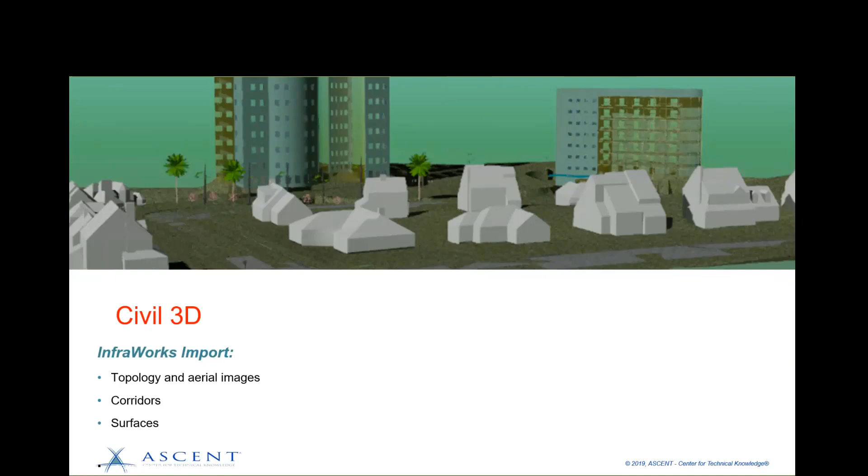Whereas InfraWorks was a nice conceptual visualization tool, for me Civil 3D is primarily a design development, detail design tool. We'll be importing the InfraWorks model we generated last month—the topology, as well as the corridors and surfaces—directly into Civil 3D. We'll also be referencing other sources, such as GIS sources.

A little caveat here: there's a very nice tool both within InfraWorks and Civil 3D, the ArcGIS connector, but I won't be using that. I didn't use it last month, and I'm not going to be using it in Civil 3D.

We'll be incorporating the sketch we generated last month, as well as CAD and Revit so-called drawings, which are DWGs exported from Revit. The Formit FBX file we could use for Formit is no longer supported as an import in Civil 3D.

We'll be looking at design options within Civil 3D by utilizing data shortcuts and swapping out different data shortcuts for different options. We'll be looking at different sites, and we'll be managing the XREFs through various layer states.

And then finally, in preparation for Revit, we'll be producing a shared reference point that Revit can read. Then we'll be publishing our surface within Civil 3D to BIM 360, which can then be linked into the Revit file.

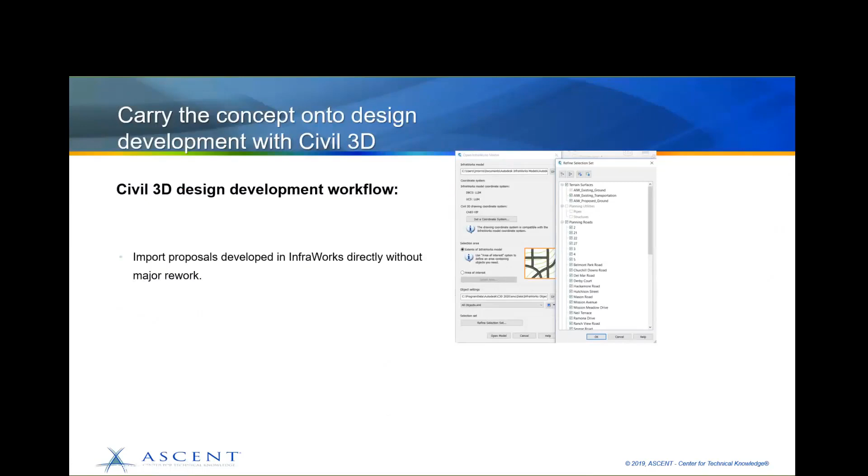So to look at this in a little more detail, we will first be importing the proposal from InfraWorks directly into Civil 3D without any major rework. We'll be XREFing in the 2D Revit footprint into our Civil 3D site plan.

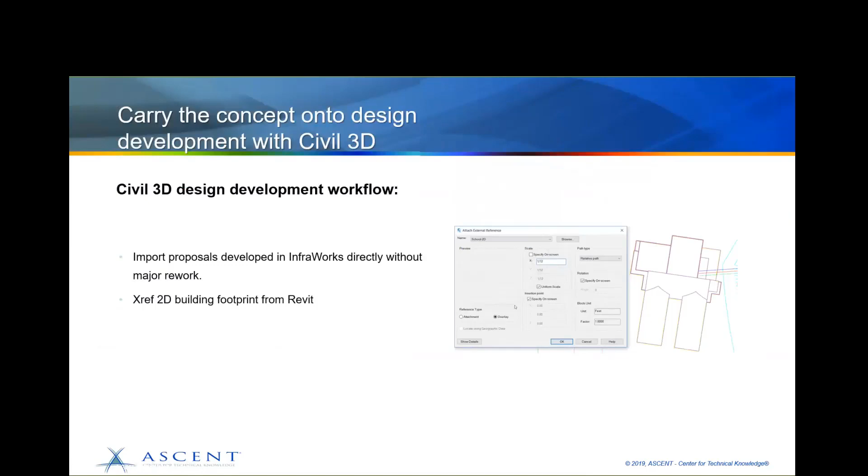We'll be using Raster Design to incorporate the sketch I generated last month. We'll be setting up an XML file for shared coordinates to be imported into Revit later on. And then we'll be swapping out data shortcuts through the Data Shortcut Manager to look at various design options and see how they fit within our overall design.

We'll be using Civil 3D sites for additional layout options, and then finally we'll be publishing the surfaces we generate in Civil 3D into BIM 360, which can then be incorporated into Revit.

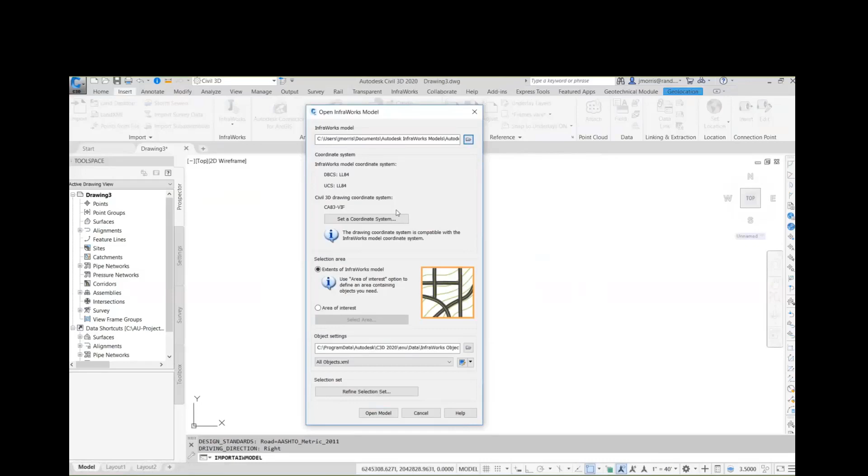Rather than bringing the entire InfraWorks model, I'm going to select the area that I want to import via Window. And it brings in the same Bing Maps file that we had in InfraWorks, so we can see the area that we want to import.

And now that I've limited the area that I want to import, I can also refine my selection set by selecting the InfraWorks objects that I do want to bring in. I don't want to bring in the planning roads—those are the roads that InfraWorks generates automatically from the model builder. I do want to bring in the component roads, which will be converted into Civil 3D corridors. And for the surfaces, I don't want to bring in the existing transportation surface. That is the surface that gets draped over the planning roads, which is basically already your existing surface.

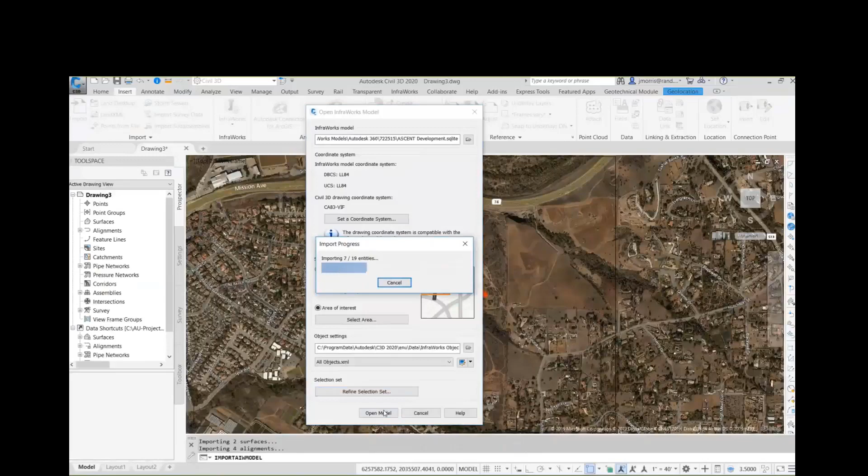So I'm just bringing in my component roads and my existing ground and my proposed ground that I generated last month with the grading. And then I open the model. It takes a little while to import that. And now I no longer need the Bing Maps, so I go to my geolocation tab to turn off my Bing Maps.

Now what I'm going to do is I'm going to save this into my surfaces reference file as IWX surface. And we have our data shortcuts already set up, so within this drawing, I'm going to create data shortcuts for the InfraWorks surfaces, my existing ground, and my final ground.

Now, after I did that, I'm going to do another Save As, and I'm going to save this now in my working folder. Now, this may seem a little bit strange, but bear with me, and hopefully eventually it'll make sense. Because in my workflow, this is now going to become my working drawing. I'm going to call it Concept A.

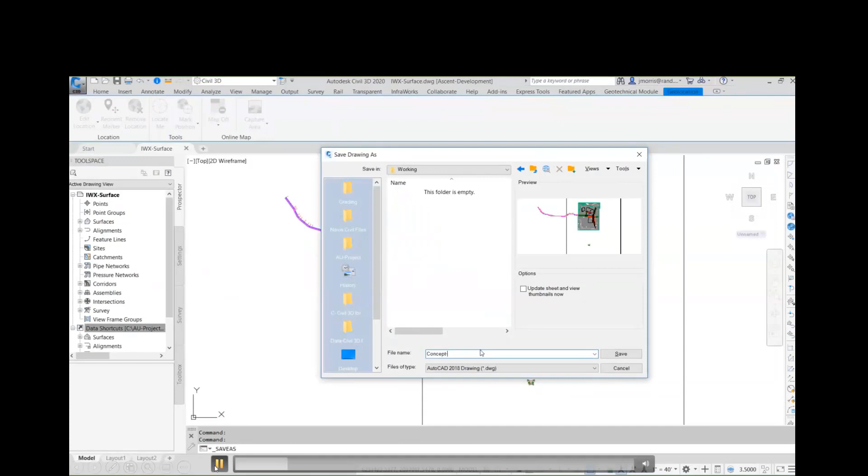Because I want to have ultimate flexibility in the surfaces that I want to swap in and out, and for that reason, I'm going to now rename the surfaces to simply EG for my existing ground and FG for my proposed ground.

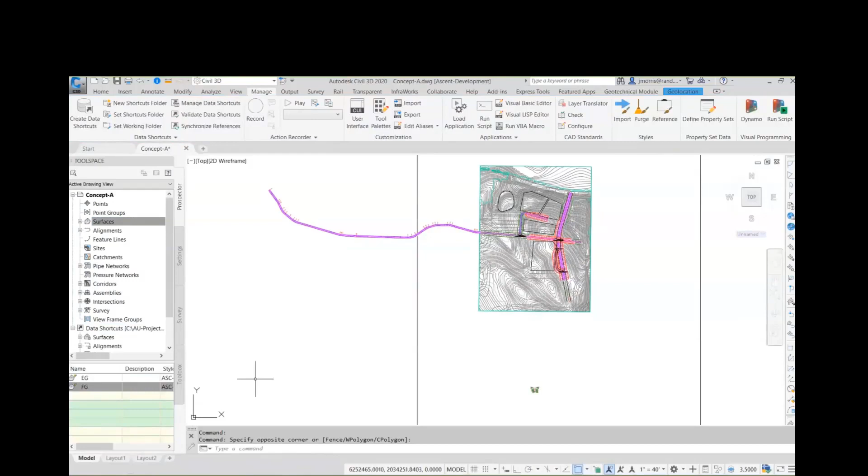And then I'm going to go to my Manage Data Shortcuts, and I'm going to link my existing ground to my InfraWorks surface. Make sure to click the link button in between, and also link my final ground to my InfraWorks finished ground surface.

So once again, the reason I'm doing that is later on, as we get into more design alternatives, I can go to my Data Shortcut Manager and simply swap out other surfaces that I may have into EG and FG, and the dynamic relationships within Civil 3D will be maintained with these different surface options.

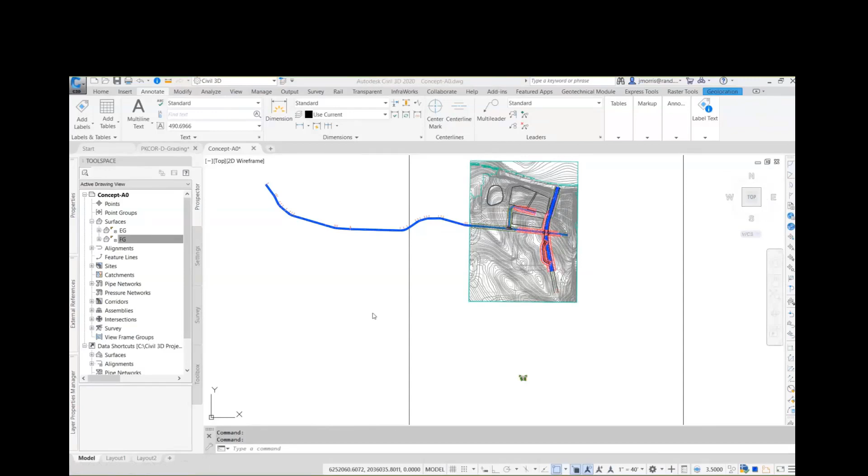So as I did last month within InfraWorks, I did a slope analysis, an aspect analysis, and we also did a variety of earthworks calculations. We're going to be doing the same thing within Civil 3D. We're going to start our slope analysis.

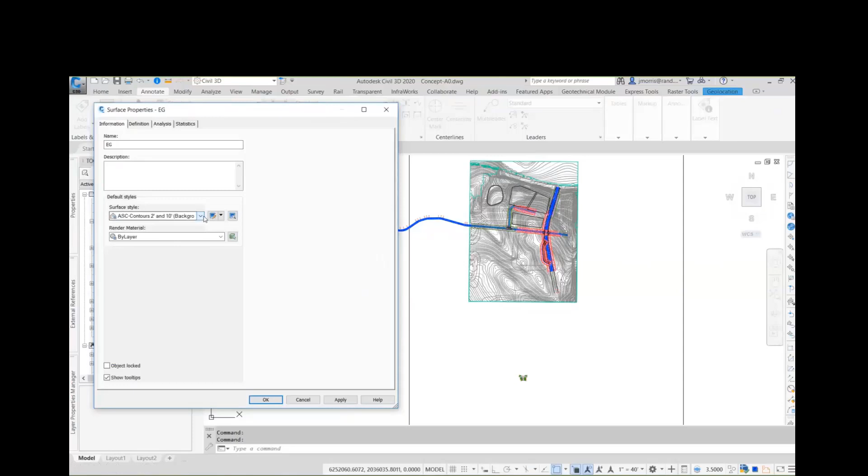The 4 ranges are already set up, going from 5 to 30%, and I duplicated the colors that I had in InfraWorks. I go over and I set my style to the slope style, and it does the analysis on that.

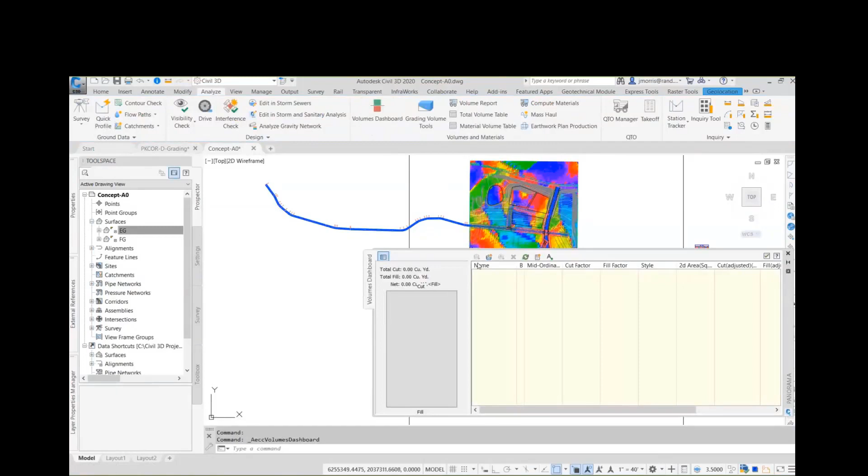And very similarly, I can do the aspect analysis like I did last month, again with the same steps that I did earlier. And for my earthworks, I'm going to go to my Analyze tab, my Volumes dashboard, and I need to create a new volume surface. I'll call it Site Volumes.

And I'm going to compare my existing ground, EG, with my finished ground, FG, and it calculates the volume between the two.

Now with that site volume surface that I have, I can do another range analysis, and it's going to show me where my cuts and my fills are. The deeper the cuts, the deeper the red, and the same for the greens.

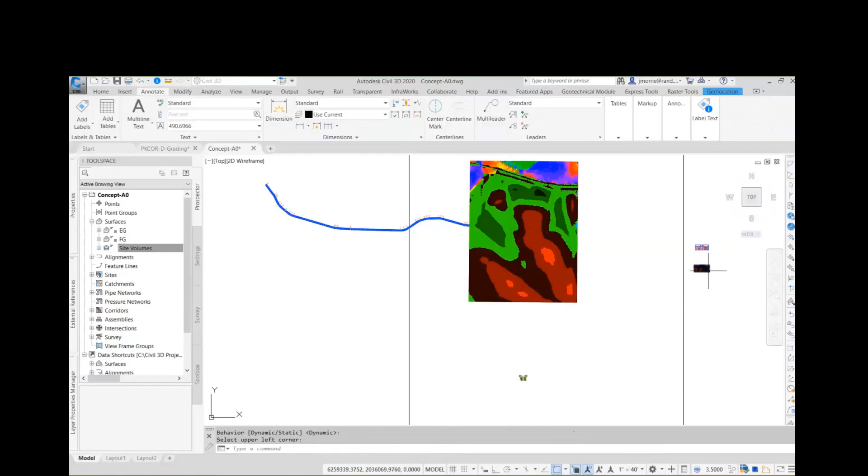Now in InfraWorks, the volumes were all shown in a tooltip, and I had to write these down. With Civil 3D, we can make these permanent by producing tables. I'm going to add a table for my volume surface. It's a dynamic table, so as the surfaces change, my volumes will update. I can also produce another table for my slopes above.

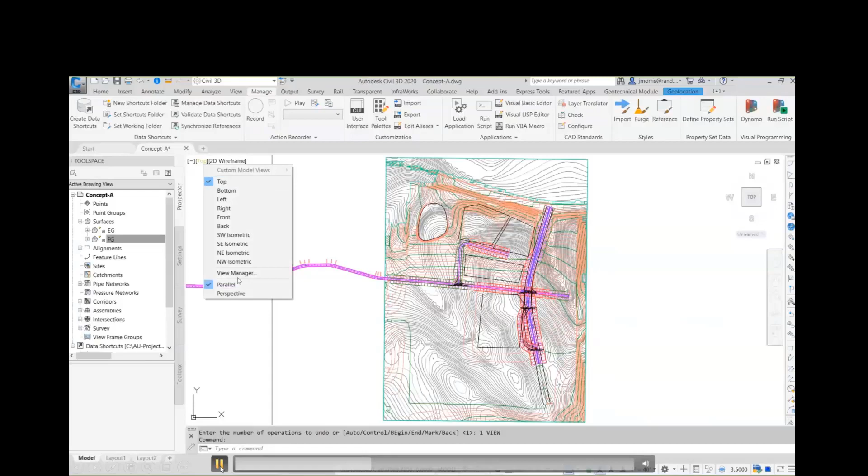I'm going to jump forward a little bit. In InfraWorks, we had bookmarks so we could quickly go back to a particular area we want to work with. We can duplicate the same with Civil 3D via AutoCAD by producing a variety of views. I'm zooming into the area I want and creating a view for this, called Plan. Go to my View Manager, create a new view for Plan, and be careful of the layer snapshots - it's kind of a double-edged sword with that functionality, sometimes it can mess you up.

Now I'm going to attach my XREF, very similar to what I did last month within InfraWorks, of my proposed engineering. That XREF was georeferenced, so I selected it, and it came directly at 0,0, rotation angle 0, and it fell right into place.

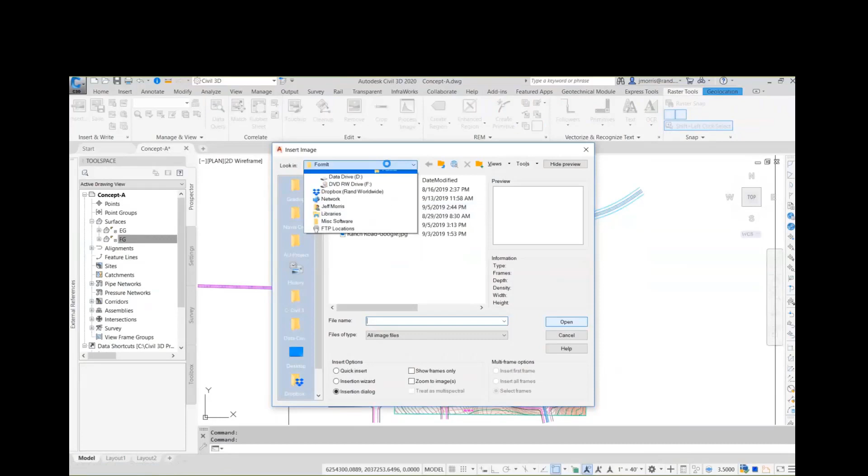I'm bringing in my sketch that I generated last month with the SketchBook program, like I did with InfraWorks, and I'm utilizing Raster Design for this tool. So I select via my Desktop Connector, I go into BIM 360 via my Desktop Connector and select the image I want to bring in. I'm using my insertion dialog box, and I'm going to pick my insertion point and roughly give it the scale that I want.

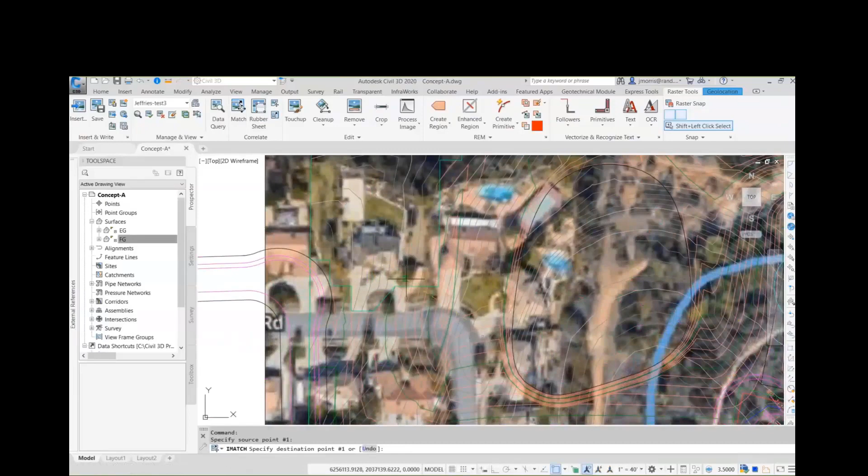Last month within InfraWorks, we could place by reference point, with up to 3 reference points so we could reference the image to the model. Within Raster Design, we have 2 options: rubber sheeting, which allows us to rubber sheet with as many reference points as you want, or match, which allows 2 reference points. In this case, I'm going to use the match command. I select the point within my image, and then tell it which point that should coincide with the model. With the match command, I can do that up to two times.

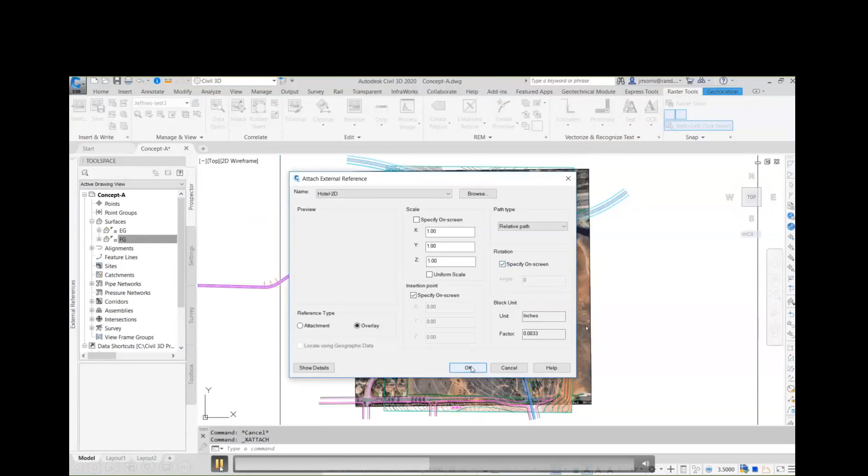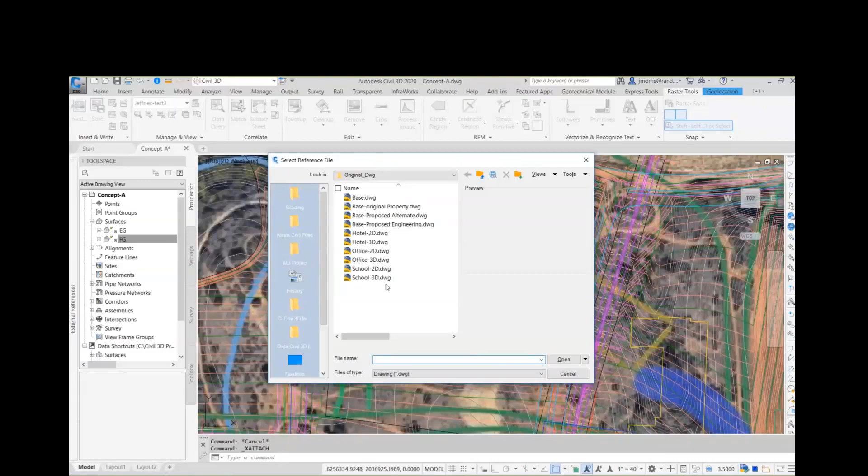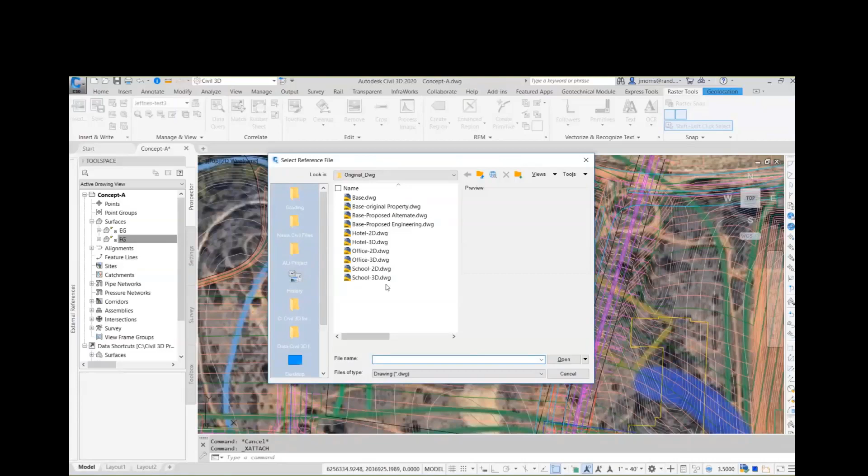Now I want to place another XREF - this is the 2D footprint of my Revit hotel and my Revit school. In this case, I need to specify my insertion point and my rotation, and I kind of eyeball where it should be and eyeball the rotation angle. I'll be using the Align command, the AutoCAD align command, later on to bring it into place. You'll also notice I have different DWGs - Hotel 2D and Hotel 3D, Office 2D and Office 3D - so that I can swap my 2D footprint into a 3D model for visualization later on.

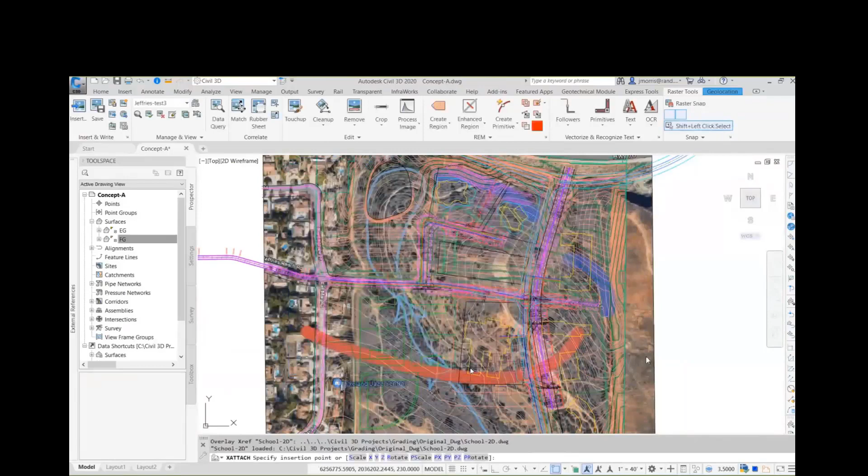So we're bringing in the school now. I place it into place and eyeball the rotation; later on I'll use the align tool to finish that up. With the school, even though it says it's 1:1 and my base unit is feet, it's actually not, and I have to scale it down by 12. When I select my insertion point, the crucial part is that I use my Nearest snap and select the contour, so it brings it in near that contour elevation.

Once again, I position it as properly as best I can, and I'll be using the align tool later on. The align tool is not at all like the Revit align tool, but in some ways it's just as powerful. It allows me to pick 2 or 3 points, similar to what I did with my match, and I select my destination point.

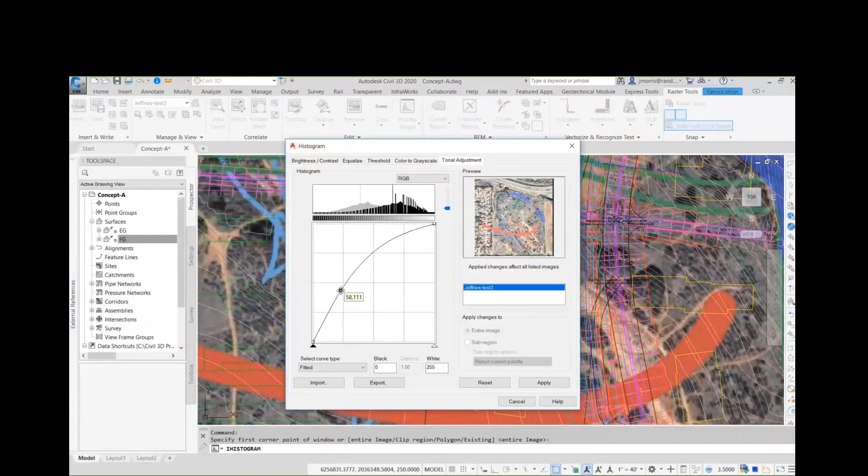Before that, I'm going to process this image. It's a little bit too strong, so I select the image, and within the histogram, I can adjust the tones of the image, and see the preview as to how it's going to be adjusted. Now the image isn't near as strong as it used to be. But on second thought, I don't even want to see the image. What I like about raster design is I can have multiple images and simply select the image that I want to load or unload or edit with the pull down.

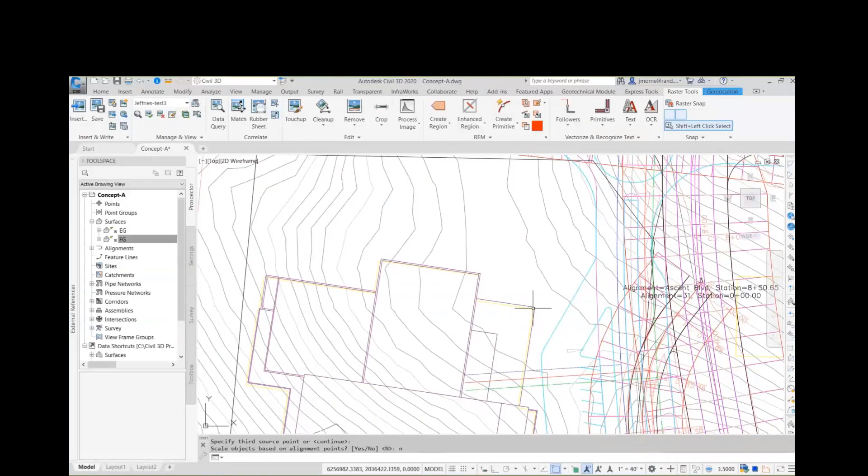Lastly, here's where we're going to be using the align command. This is where I use the .xy filter when it needs the Z. After I give it 2 points with the align command, I have the option of giving it a third point, and that would rotate it in 3D. If I don't need to rotate it in 3D, I say no. Then it asks me if I want to scale the objects based on the 2 points, and again I can say yes or no. In this case, I said no, I don't want to scale the object.

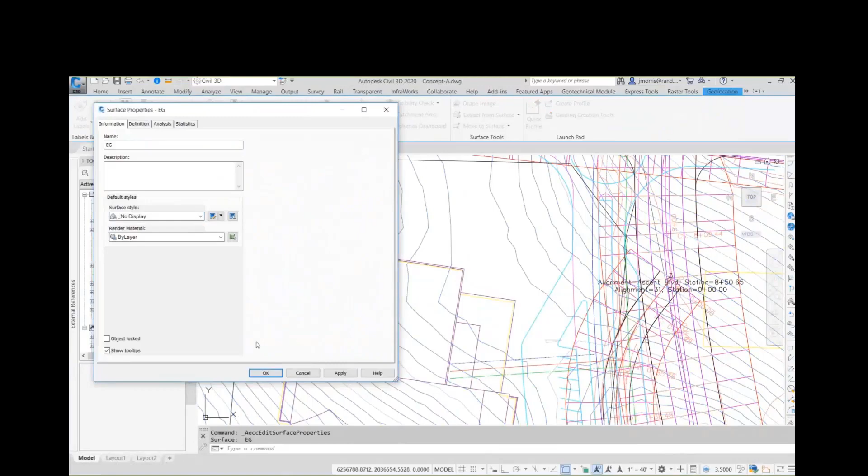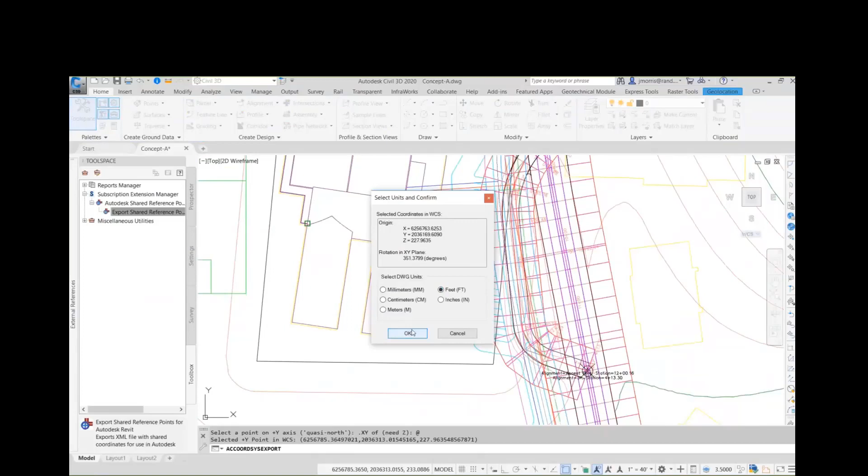Now it's time to generate the shared reference point. So I go to my toolbox and execute my shared reference point. It's looking for the base point of my building. So I select my base point, and here again I use my .xy filter that is also accessible through my right-click menu. Here's my .xy, select that point as my quasi-north, and again I put the @ symbol in. I verify the elevations and that this is in feet, and then I browse out, it already goes up to BIM 360 for the shared reference point XML file.

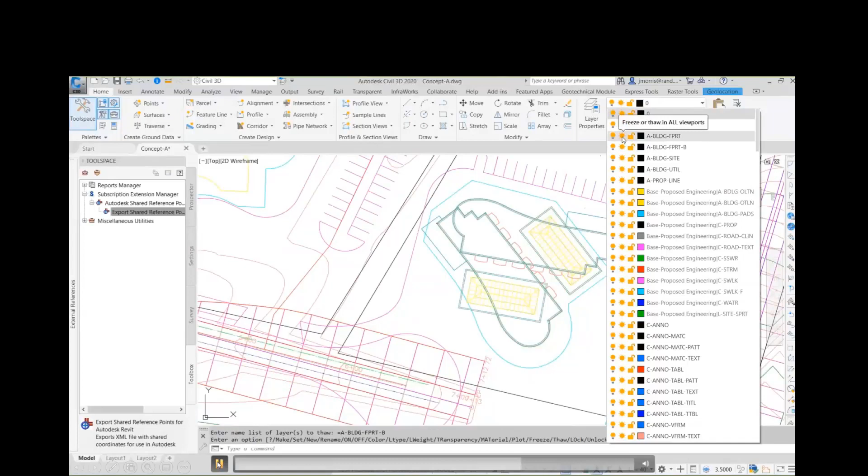Now with regard to the school, the hotel, we have 2 different options, and I have 2 different layers, building footprint and building footprint B. Both XREFs are in there, and they're on different layers. So simply by thawing and freezing a layer, I can look at the different options available to me. I'm going to thaw my building footprint B and freeze my building footprint.

And I'm going to execute my shared reference point again by selecting my base point, my quasi-north point. Again, I give it the elevations. And in this case, you notice that I picked the wrong point, so you see that the Z elevation is actually 14. So I'll need to redo that. Always keep an eye on this select units to see that the elevation is in the proper range.

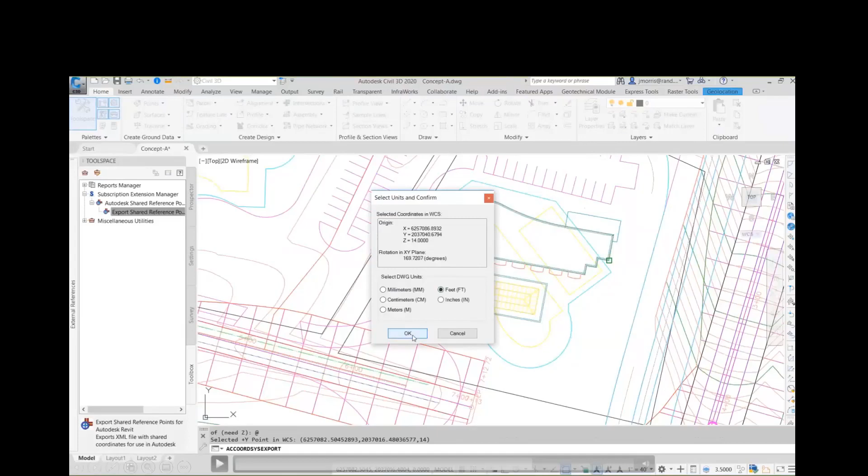And again, I share it into BIM 360 via my desktop connector. It doesn't need to be shared in BIM 360. You could just simply email that to your client.

Now we're going to generate a feature line for our preliminary grading. I select this XREF boundary as my feature line, and this is where we get into options. I kind of skim over this a little bit, but let me explain this more. The options within Civil 3D allow the sites to work with multiple design options. The sites will contain grading objects, parcels, some alignments if need be. The nice thing about sites is that we can have all these different design options available to us, all within our grading and our parcels, etc.

And then when we decide on a particular design option, that's when first we'll need to archive the drawing, and then we can simply delete the sites that we no longer need, and all the alignments and feature lines and parcels and grading that belong to that site get eliminated in one fell swoop. So with proper management, it works quite well, but again, it can be kind of dangerous.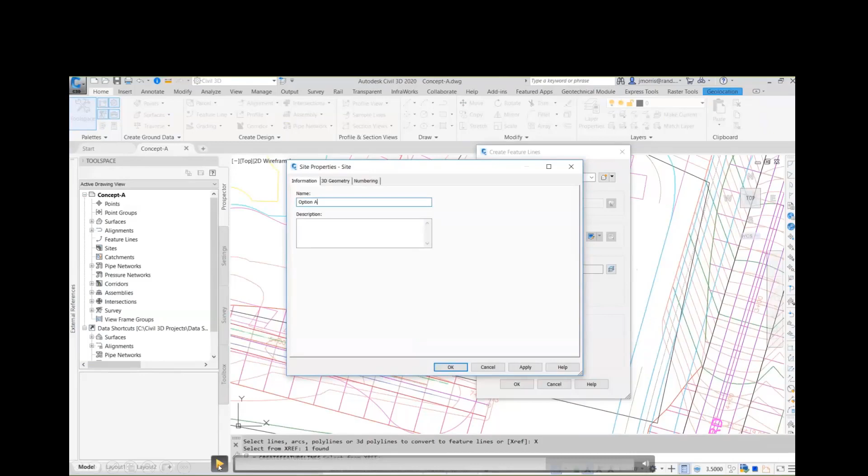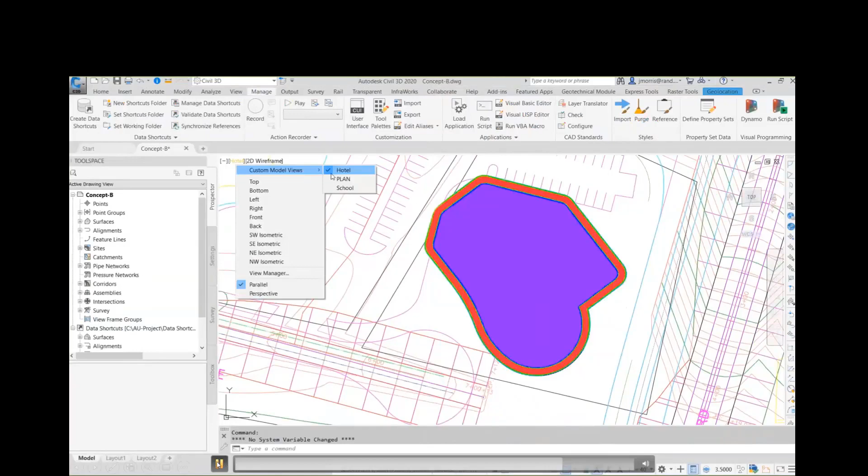I'll name this as a hotel. And the feature line, I want to read the elevation from my finished ground. I'm going to set this relative to the finished ground, 1 foot up. So as my finished ground changes, my feature line will change. Now with the grading, I finished the grading, and I simply gave it a surface style so I can see my grading. So these are the 2 features with my grading.

Now we're going to fast forward here a little bit, and we have now different design options. I can, as I explained earlier, swap out my different existing site surface and my finished surface with FG. And so we can quite quickly see the different design options that are available to us by swapping out the different surfaces through our data shortcuts.

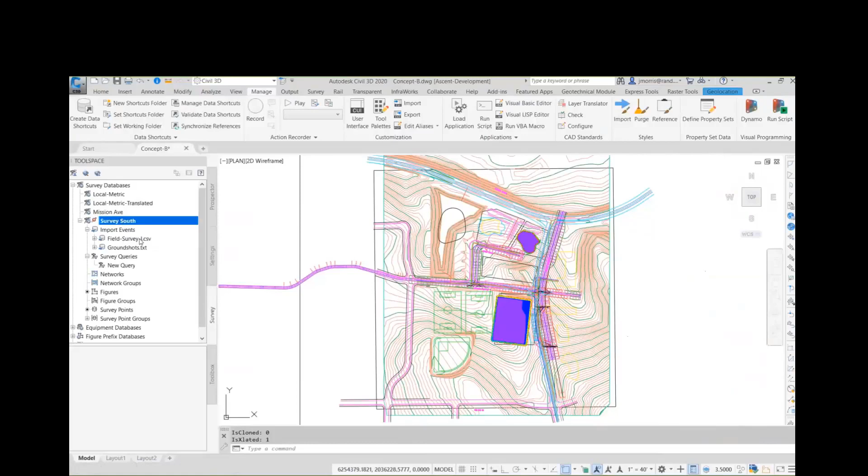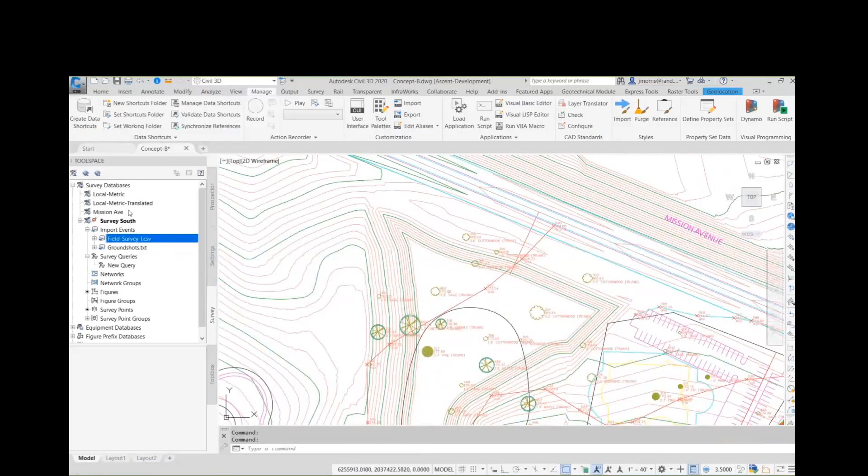Now we have some surveys that we can incorporate. They've already been processed, so I can simply right-click on the survey I want and insert it into my drawing. With a well-tempered survey database, the trees come in at proper scale regarding the drip lines. And as I bring in my field book and insert it into the drawing, it comes with all the points and all the survey figures as well.

Now it's time to publish our surfaces. We're going to publish our hotel surface. For this one, we do require BIM 360, and it goes directly through our desktop connector into the BIM 360 project. We're publishing each surface to its own individual file, and we're going to update the surface style so we have better fidelity within Revit later on.

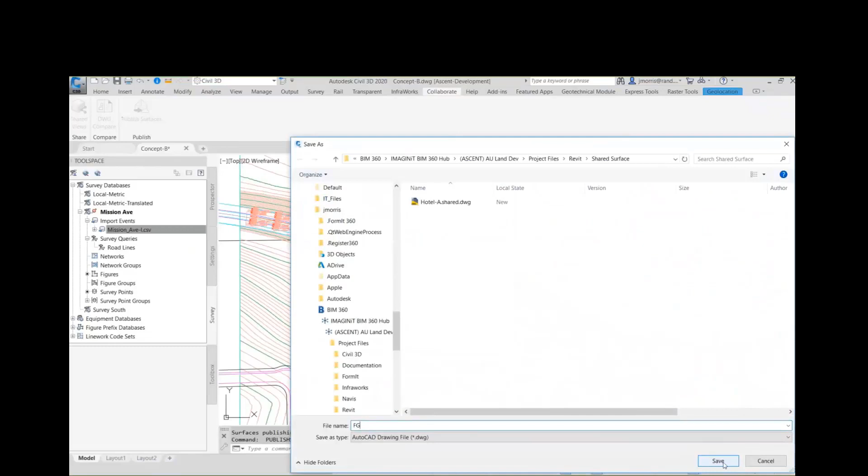I'm going to publish also my finished ground surface. It goes again into our BIM 360 hub via our desktop connector, and we're going to swap out our styles as well. Now, if you're quick enough, you can right-click on your system tray to see whatever your pending options will be within your desktop connector.

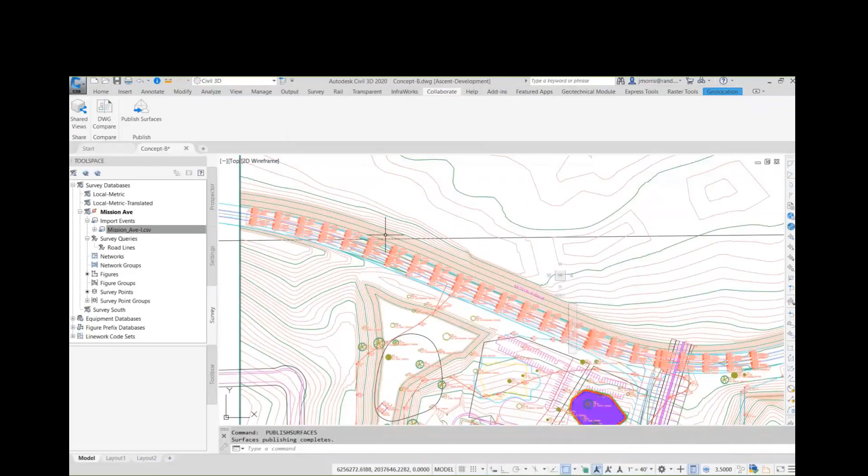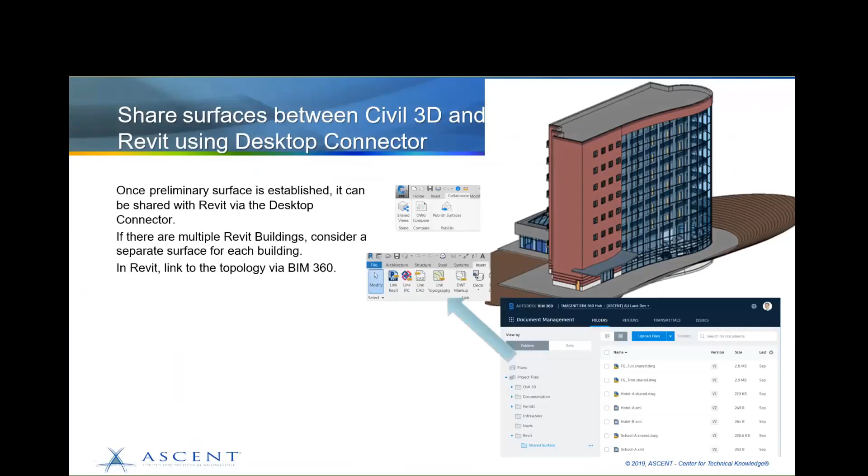So the next step is to go into Revit. As we saw, we just published these surfaces to go into Revit via the desktop connector. If we have multiple Revit buildings, we should create multiple surfaces to be as flexible as possible. So via BIM 360 and Revit, we go to link our topography. The links within Revit of the topography become a new tab within Manage Links, and I can load them, unload them, reload them, just like any other link within Revit.

So within Revit, we're going to be creating the base point and our survey point, very similar to what we did in Civil 3D, to read the coordinates and elevations of that shared reference point we generated. In Revit, we also have sites that are different than the Civil 3D sites, and we typically want to rotate our site plan to true north versus project north.

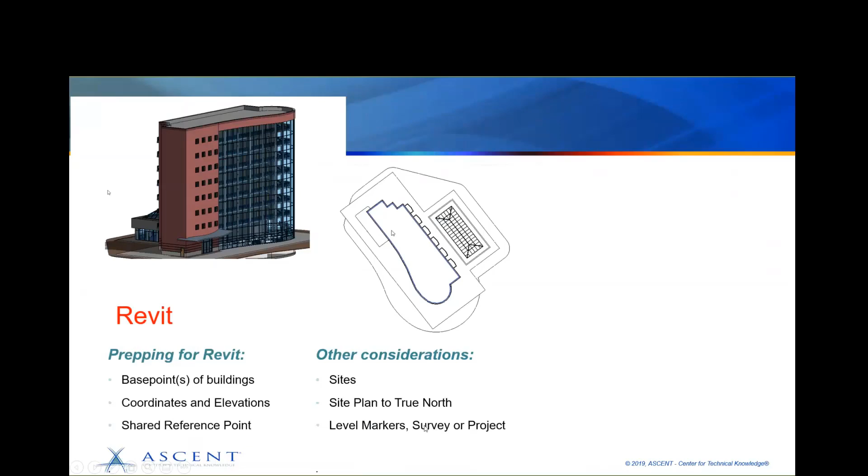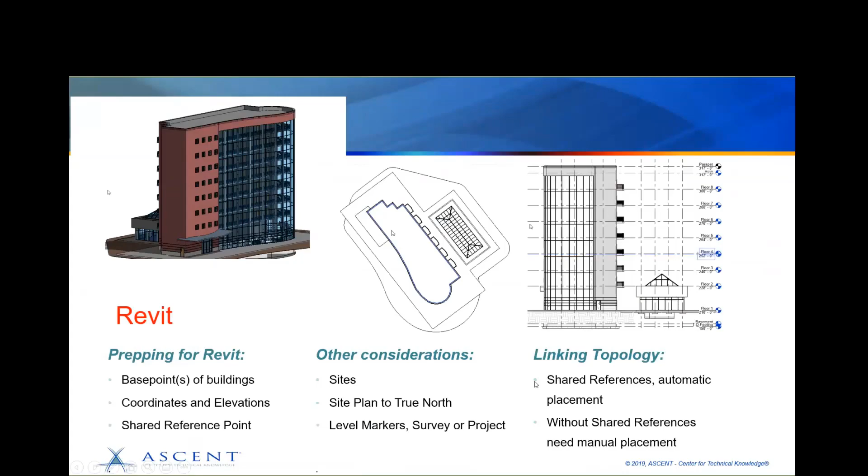The level markers within Revit can either be project-based points, so they're relative to our ground level, or they can be survey elevations that would give us the sea level elevations. And then when we link our topology, since we have the shared reference point, the topology falls right into place. Without the shared reference point, we need to manually place them.

Again, this is a pre-recorded video, so wish me luck.

So in Revit here, we have 3 drawing tabs already set up. One shows a 3D view, one is the east elevation of the building, and one is the site plan.

First, since we're going to change our coordinates, it's probably wise to do a save as of this project and call it Modern Hotel Shared, just in case something happens. On my site plan, I'm going to go to my project properties and change my orientation from Project North to True North and apply that.

Nothing has happened yet because we haven't yet brought in any reference points. So we're going to bring in our shared reference file, and just like Civil 3D, I select my base point and my true north point. In this case, I don't need to worry about the elevations.

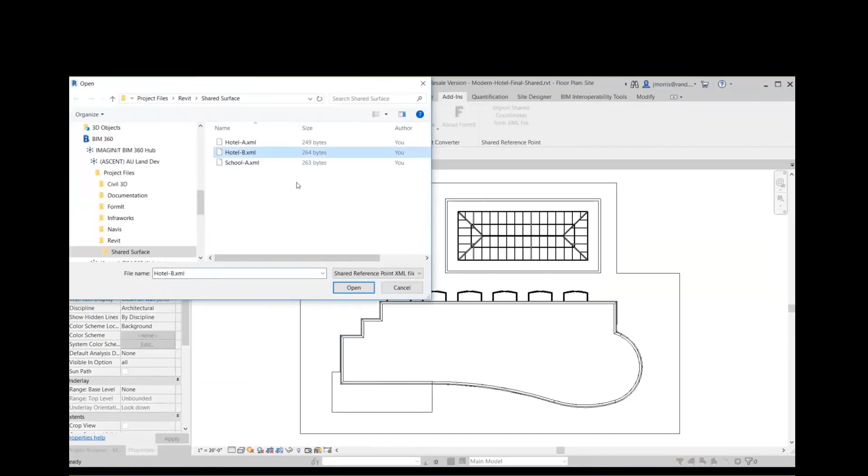And I select the reference point from the BIM 360. It's just confirming that I do indeed want to create a new site for this. And again, nothing has happened. I'm going to be bringing in the Hotel B option as well. Again, the site plan doesn't yet reorient itself to True North because we haven't changed sites.

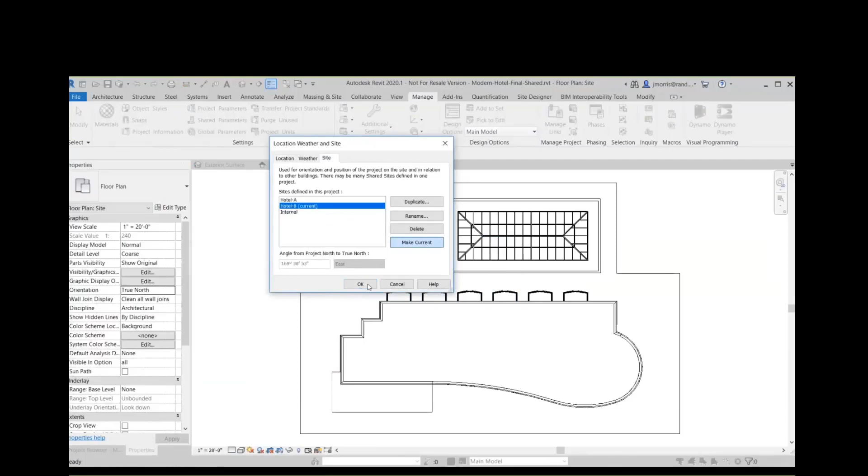So if I go to my Manage tab, I have my sites, and here are the 2 sites that I brought in, Hotel A and Hotel B. I can make those current, and finally our site plan orients to True North.

This is Hotel—if we go over to Hotel A and make that current, again the site plan orients itself accordingly.

And we also, now in our elevation markers, see currently they are set to the project base point, so the ground level coincides with 0. My second floor is 18 feet up. Normally I would have 2 different level styles, one for survey and one for project base point. Also notice in the elevation, I as yet do not have any ground elevations.

There's no ground pattern beneath my building because we don't have a surface here yet. But in this case, I'll show you how we can simply edit the type from project base point to survey base point rather than having 2 different styles.

So I edit the type of my level marker and change it from project base point to survey base point. And now you see that the elevations change to sea level rather than project level.

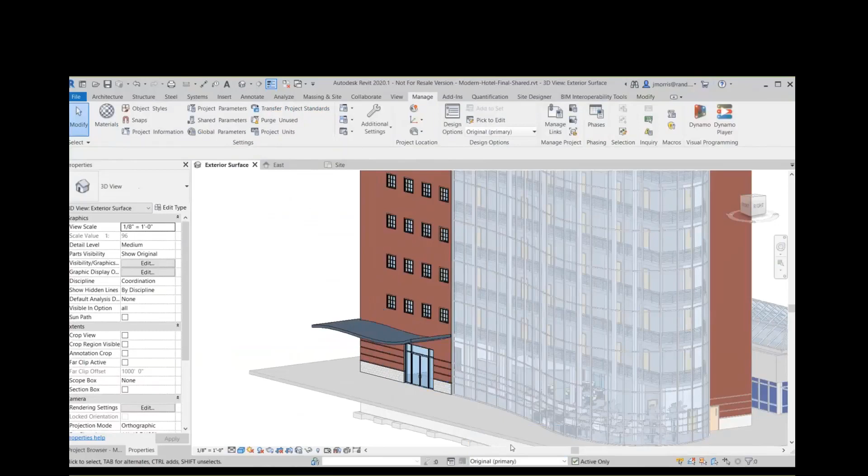Now for our design options, we can do design options directly within Revit through our pull down at the bottom. We have 2 different alternatives for our entrance, and this is one alternative. I can go to the other alternative, and you see the rest of the Revit model is grayed out because this allows us to work on the different options. And if I set it back to main model, then the whole model is now editable.

I'm going to link our topology now. It browses out to BIM 360, and I select my Hotel A. And because I have my shared reference point already in here, it falls directly into place.

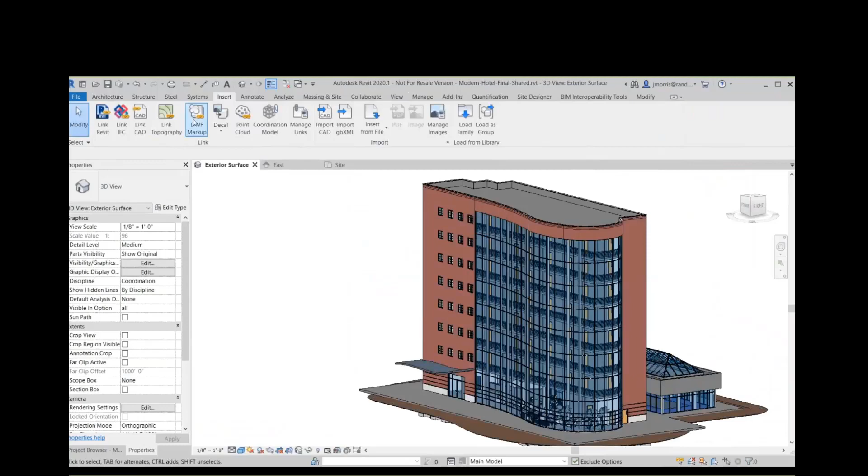I'm going to also link my final ground, my full final ground as well. And again, through the shared reference points, it falls directly into place. Now we have 2 surfaces together here.

To manage the surface, I could use my standard Revit tools by hiding that particular element and turning it off. Or another option, perhaps even more clever, is to manage our links. Here we see the topography tab that we have. These are the 2 surfaces, and I can simply unload that, or I could reload it from a different file.

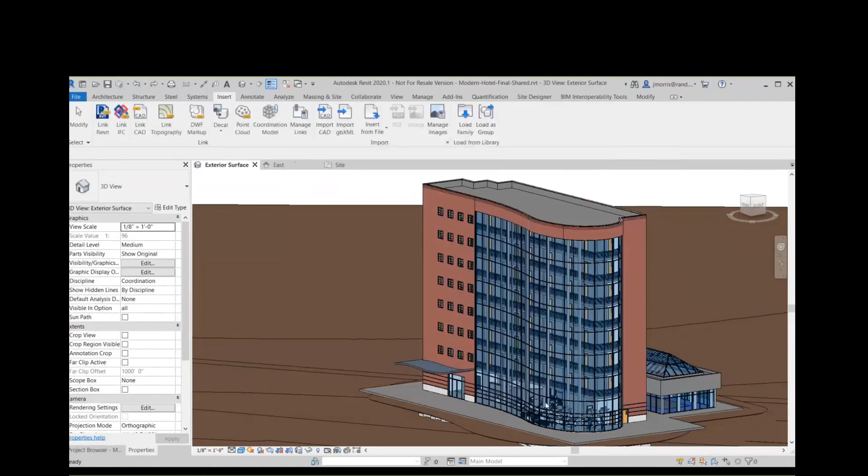Now if I go to my elevations, now you see we have the ground pattern where the surface was. Nice little hatch pattern there for my Earth.

Now that we do have our shared reference point, I can export this to Civil 3D. I have a view set up with my visibility graphics as to the elements that I want to incorporate in my Civil 3D export. And as we saw earlier, I'm going to have a 2D and a 3D survey drawing that I'm going to be exporting.

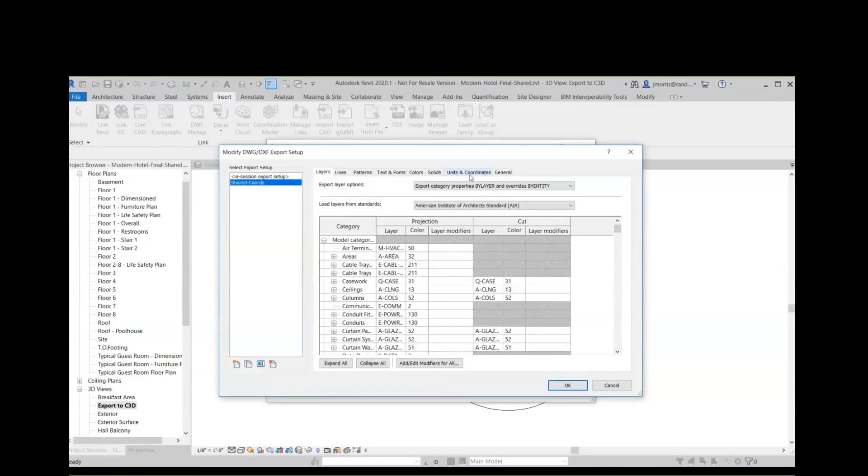So I go to Export to DWG. And one thing that you need to be careful of is in your options to make sure that under units and coordinates that we save it to the shared coordinate system. And it is here where we would also designate what the units are. This is where we screwed up with the school earlier, where we messed up the units.

Okay, moving on to Navisworks. Navisworks is a great tool. There's a lot in it that the more I dig into Navisworks, the more I like it. It's a great integrator. It's going to take a whole bunch of different files together and bring them all together. But we're going to be looking at quantification and visualization.

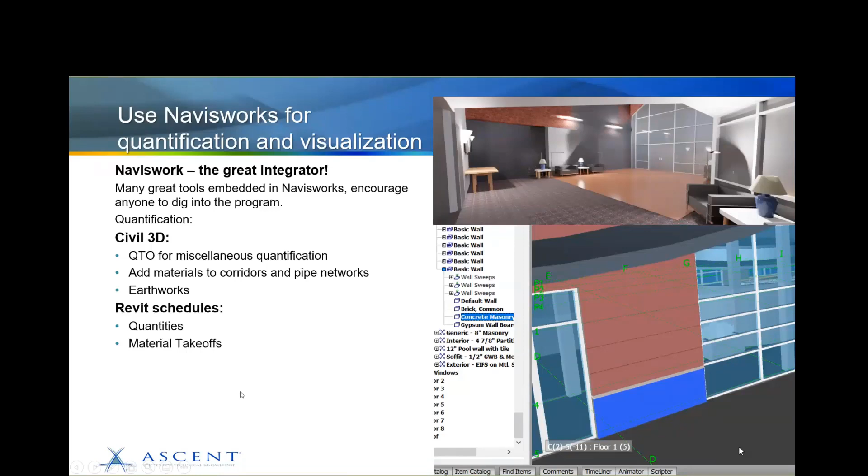And you may know that Civil 3D has some pretty awesome quantification itself. It's got a whole QTO, quantity takeoff, for miscellaneous quantification. We can add materials to corridors and pipe networks, say gravel or asphalt or paint or concrete. And we saw how we can compute earthworks. Revit itself has some schedules for quantities and material takeoffs.

So why do we do it in Navisworks? Because Navisworks can do a quantity takeoff of all of the models that it incorporates. So let's say that you bring in a Tekla model or an ArchiCAD model, an Archibus model. And you do not have Archibus itself, but we can do the quantification directly here in Navisworks because it understands all the elements that it brings in. We can also do 2D linear takeoffs via DWFs that we bring in, or even virtual takeoffs in terms of placeholders for elements that aren't there.

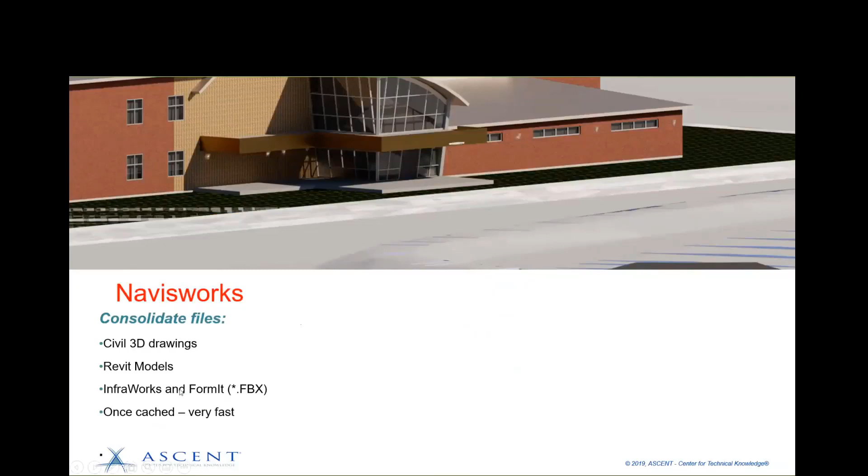So with Navisworks, we're going to first consolidate the drawings and the Revit models, and even the InfraWorks and FormIt models via FBX we can bring into Navisworks. And since most of these are already georeferenced, they will fall directly into place. And once we bring them all into Navisworks, once they're cached, Navisworks is very fast.

For the quantification, we're going to be creating a workbook that consists of resources and items. And the resource catalog will consist of all the individual bits and pieces that we want to count. And the items will take all these resources, these bits and pieces, and bring them into items. And then we can import our search sets definitions. And then we search for objects and we assign them to the items. And finally, we can export our quantification.

In terms of rendering, we'll be looking at materials and material libraries. We're going to be placing some lighting and then adjusting the environmental settings.

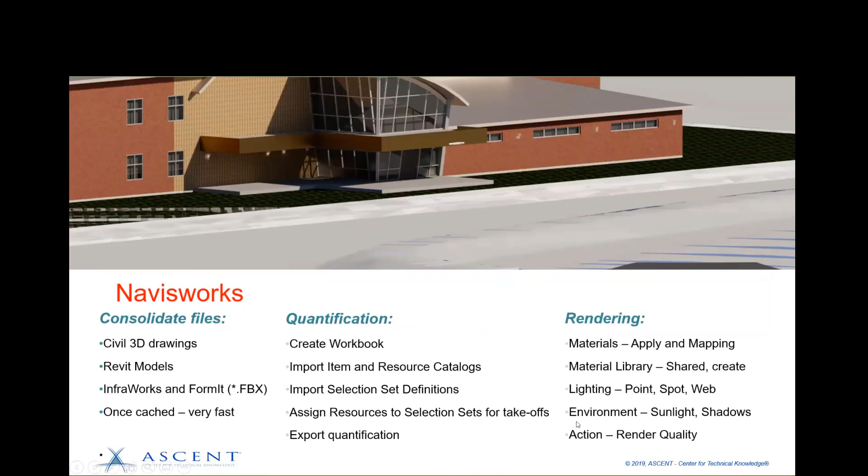Okay, so within Navisworks here, we already incorporated everything. If I go over to my sets pull down, we can see the different options available to us. This is my Civil 3D drawing, and this is my elementary school, the buildings that we brought in from InfraWorks. I'm going to zoom in.

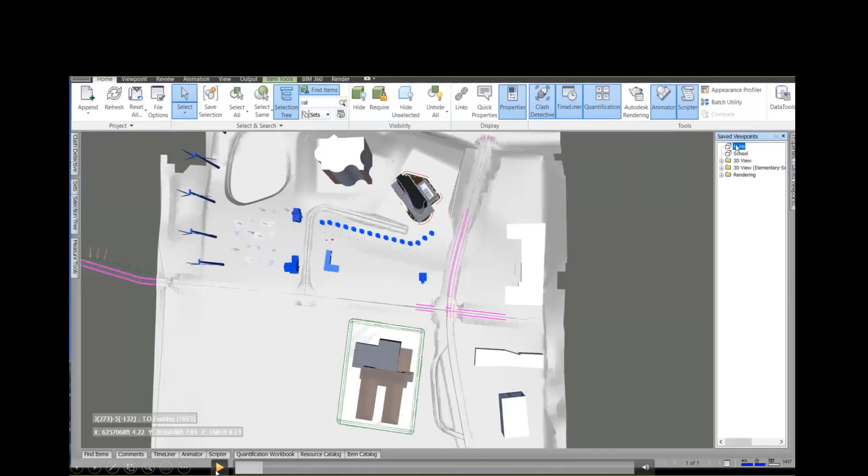Here we see the trees that we brought in from InfraWorks, as well as the city furniture that we produced last week. The nice thing about incorporating all these elements is the views that we generated in Civil 3D, as well as the views within Revit, come across as I incorporate these models, so it makes it quite easy moving around. These are the views I generated in Civil 3D, and these are the views that came in with the Revit models. I'm just going to go back out to my entire site plan.

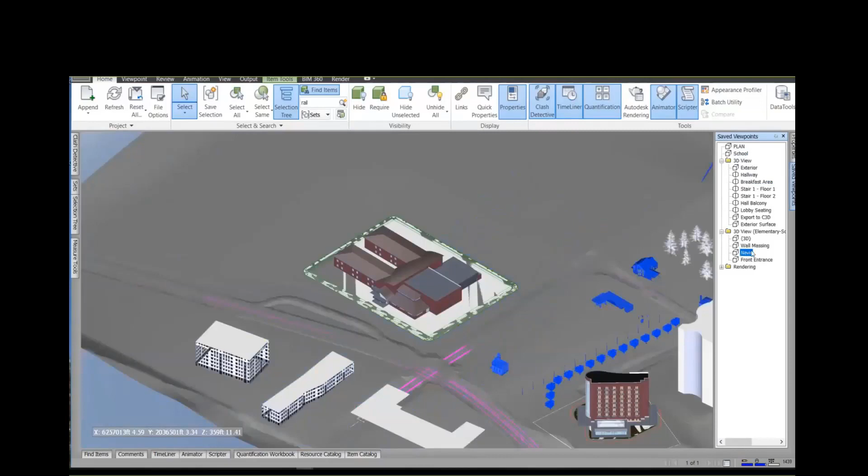Now for quantification, I invoke my quantification tab, set up a new workbook, and go to my project setup. I'm going to import the resource and item catalogs that I've already generated, which might be standard for my office. In our quantification workbook, we have the various resources, which are the little bits and pieces, and the items that are made up of these individual bits and pieces. I broke them into a work breakdown structure, and that is our overall quantification workbook.

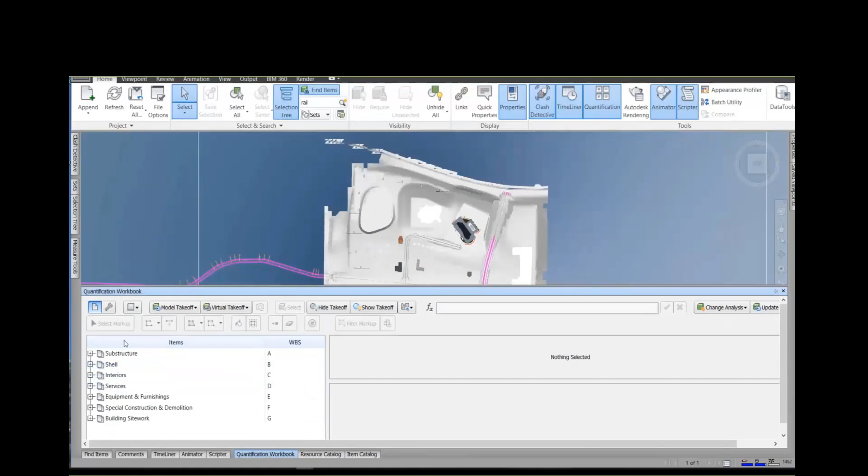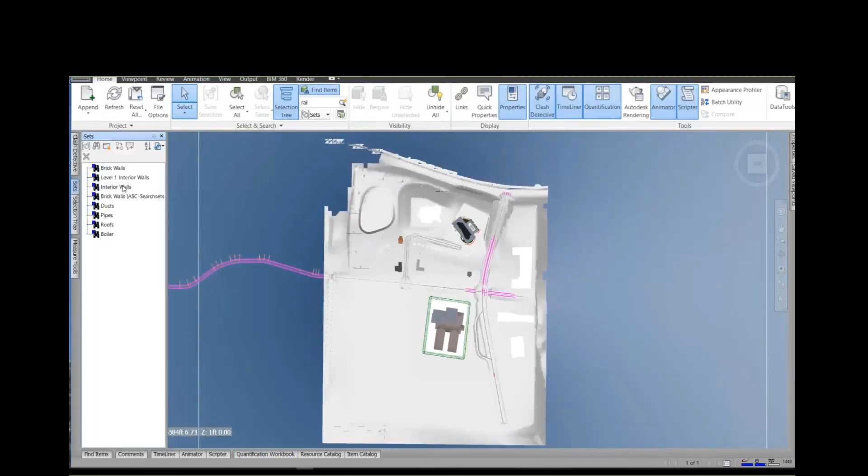Now for my sets, I'm going to import the search sets that I had, which might be a standard office practice as well. The nice thing about these search sets is it can simply select all the walls that happen to be interior, and it finds all of these walls for the entire model, not just for the school or the hotel, but all of them together. Then we simply right-click on those and add them all to that workbook.

Now for 2D layouts, I can have different DWF files coming in, and I can use these to perform a takeoff. I select the category that I want to take off, and then I can select either—let's look for standard partitions—and select these lines. It can either be an individual line, polylines, or areas. I select all the lines I want to categorize for that particular wall.

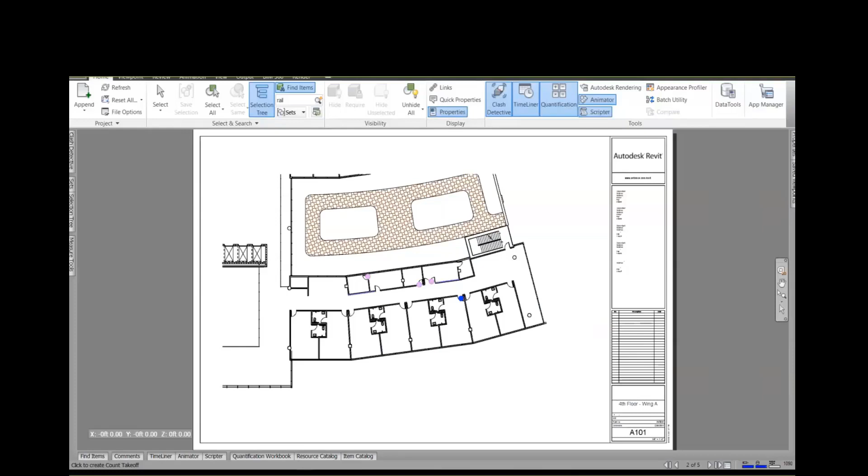I can also do counts, for example individual doors. So I select my door, a single door, and start putting markers where I want to count my doors. So this is a door, this is a door. Now it's not perfect—I'm going to select this double door as a single door, so human error can still come in. The nice thing about this is it's going to add all of this up for us. And when I save this Navisworks file, it knows how much I've already counted, so next time around these dots and lines are already there. I don't need to reinvent the wheel.

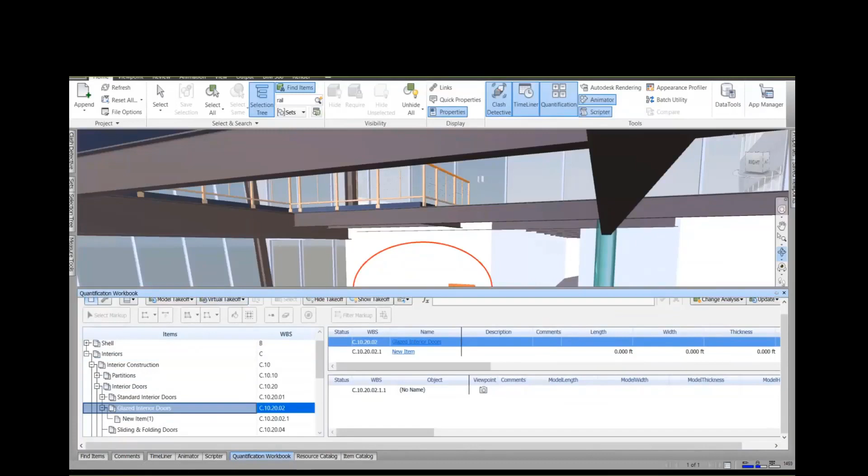Now for virtual takeoffs, let's say there's going to be a door here. I know that a door needs to go here, so I'm simply going to create a viewpoint within Navisworks and tell it that we need to add a door. I go to my quantification workbook and my virtual takeoffs, select what type of door it's going to be, and add this as my virtual takeoff in terms of a viewpoint. Then when the door actually gets generated, I can move the door from my virtual takeoff to my quantity takeoff.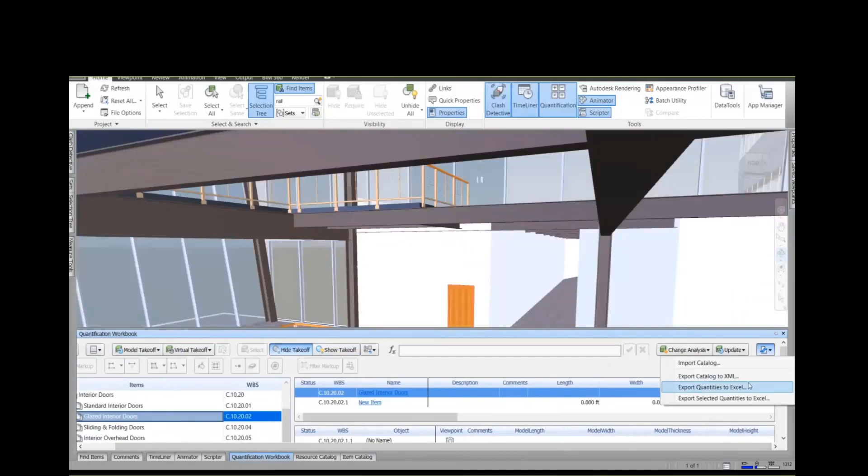Now I can also show the objects I've already taken off or hide my takeoff quantities and objects. At any point, I can export this to my Excel spreadsheet, save that in my project folder, and it opens up my spreadsheet with the quantities I have so far. So it's all very efficient and quite user-friendly, especially if you start using predefined objects criteria.

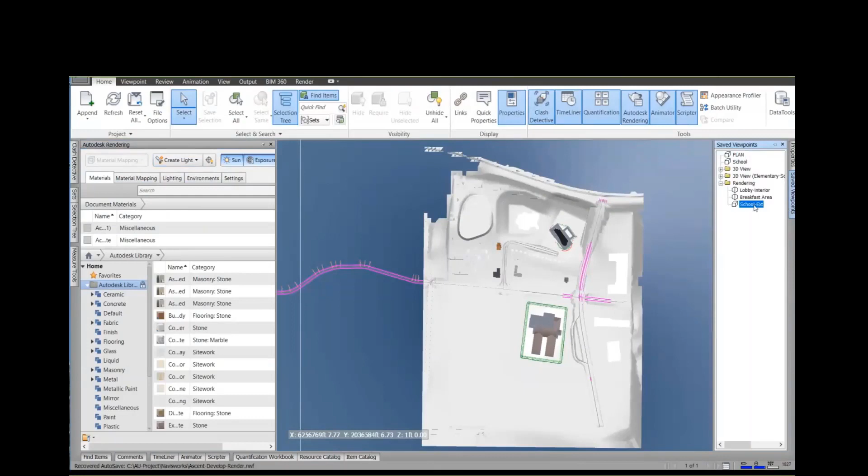Now for my rendering, I have my materials that I can use. I have five tabs along the top: materials, mapping, lighting, environment, and the settings tab. I'm going to go to a predefined view for my school exterior and select the object I want to apply a material to. Then I'll search for the material I want to apply—let's say grass. I select the type of grass, right-click, and assign it to my selection.

Now for this parapet up here, I'm going to select one object, and then I can have Navisworks look for all of the same type, and it finds all the parapets. Again, I'm going to search for brass and assign brass to all of those parapets.

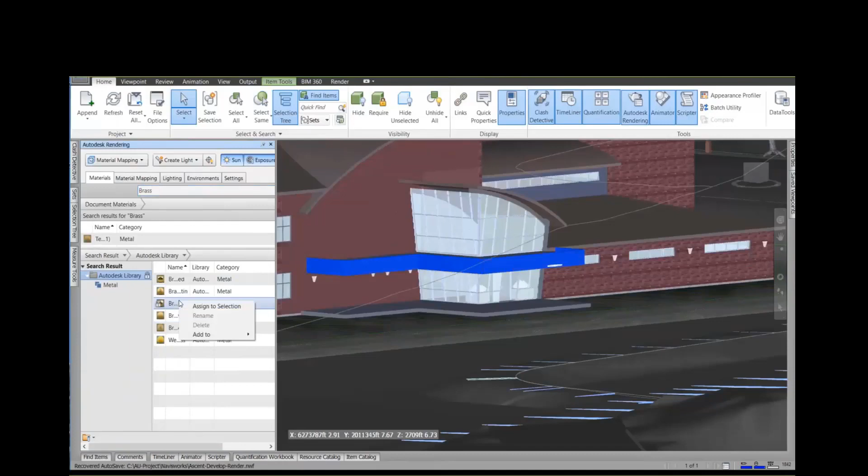We can go even further. I'm going to select one sample material and tell it to search for all of the Revit materials within the entire model, so that incorporates the school and the hotel, and we can change our brick style. I simply select which brick I want and assign it to my selection.

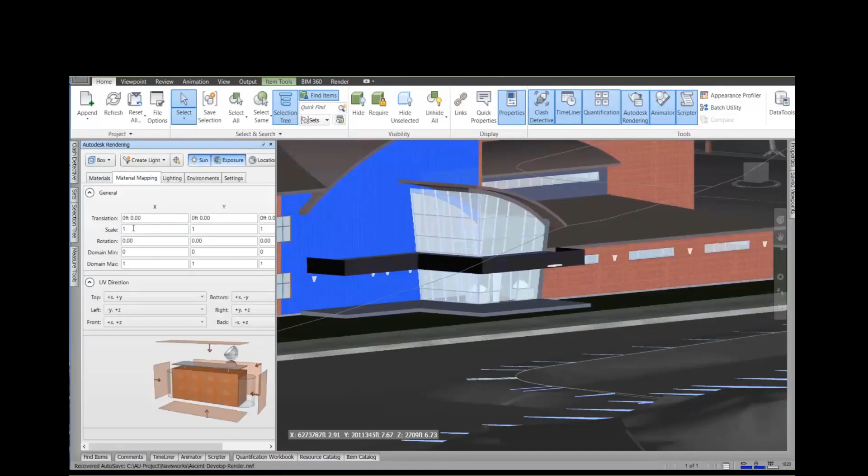Now, for this individual face, I perhaps want to see what it looks like with stone. So I'm going to search for stone, select my stone material that I want, apply it to my selection. Now, for this stone, I might need to map it, so I go over to my mapping material. I can change my X, Y, and Z scale, and even the rotation if I wanted to.

Now for the lighting, I'm going to create a spotlight. I already have some Revit lights here, so I select where my spotlight should go and the direction, and Navisworks immediately calculates the light of that particular area. You see how the interface has changed now, the whole thing lightens up. I'm going to create another spotlight over here.

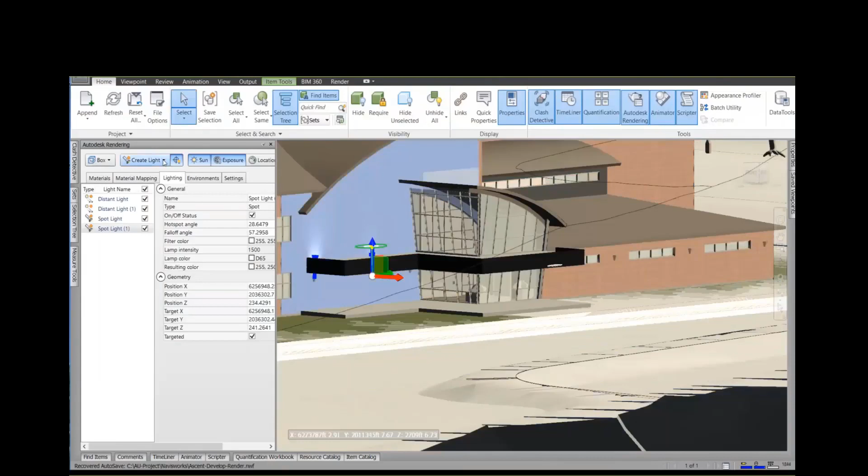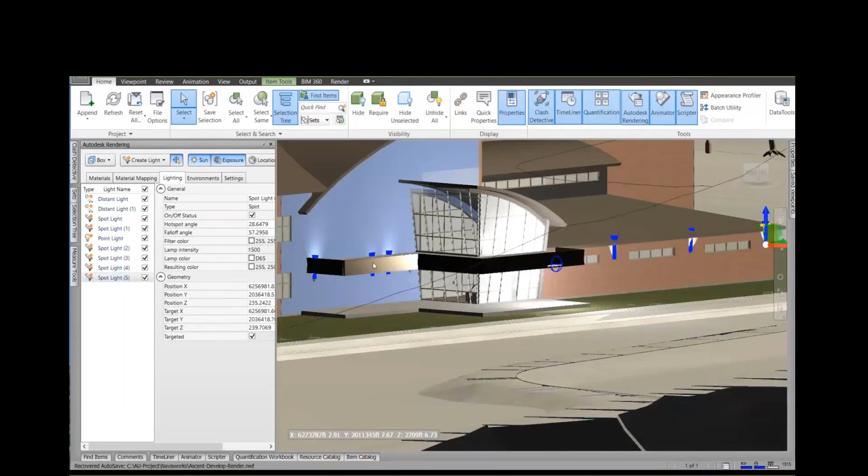Let's generate a point light. With the point light, I don't need to give it a direction, so I'm going to put that over the entrance here. And the whole interface adjusts with the new light source. I'm going to jump ahead a little bit by creating the rest of the spotlights, and I'll turn off my glyphs so we see the lights themselves.

Let's go to our environment, and we can change the color of the sun. I don't need to give it the location because everything was geo-referenced, and it already understands the lat and long, so all I really have to do is tell it the date and time that I want the light for. I can have other settings, change my sun, my exposure, etc.

And if I turn off my sun, then I see a nice little night view with the lights that I've generated.

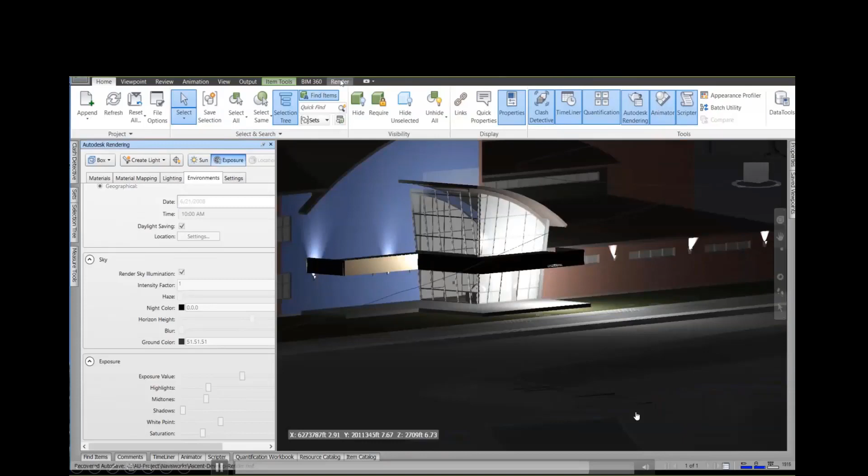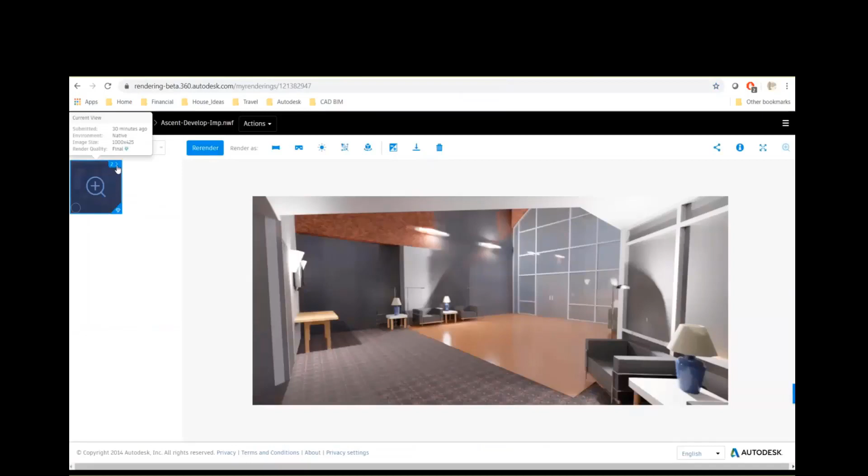Now comes time to render this, and I can render it to the cloud, which is my preferred method because it's just so much faster. I can give it my cloud settings, it'll upload everything into the cloud, and shortly thereafter I'll get an email stating that my rendering is complete. I can view my project, and I have two renderings here: this is for the interior of my school lobby and the exterior that I just sent up. Then I can save these as JPEG files.

Or if I wanted to, I can also pick my interactive ray tracing, pick the time frame that I want to render it for, and once again I can save this as an image to be brought into my project file.

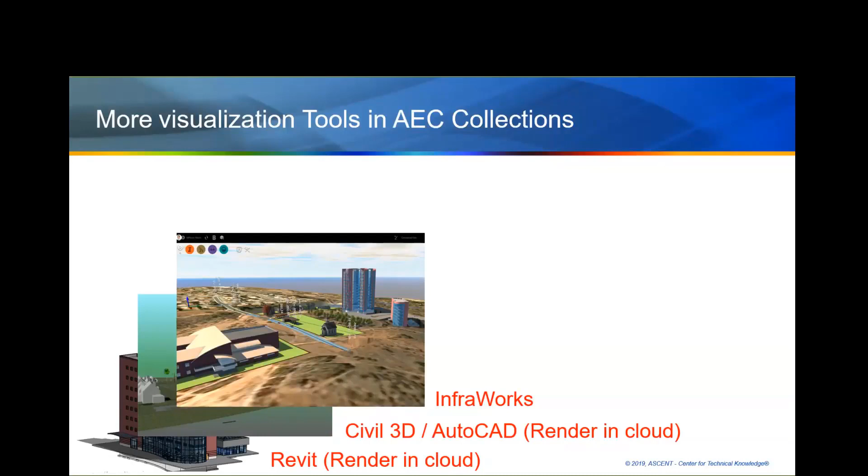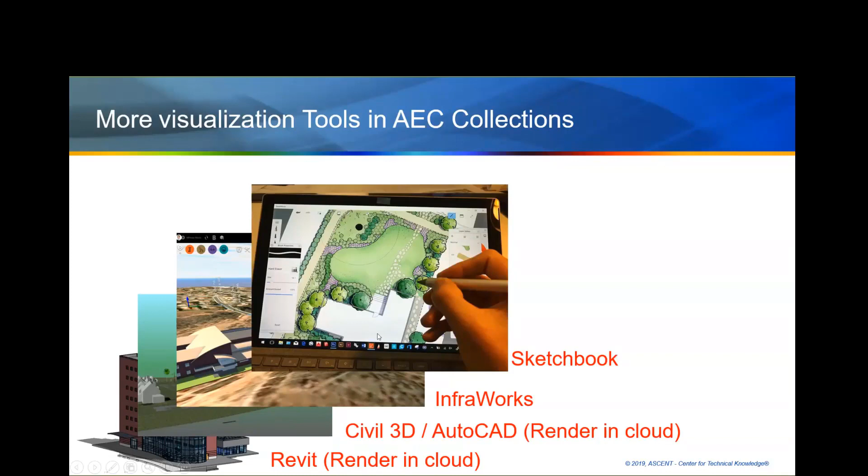So there are more visualization tools that we have in the AEC collection. We can render within Revit, which will also allow us to render within the cloud. Civil 3D and AutoCAD can do some renderings as well, also rendering in the cloud. InfraWorks has some pretty nice rendering tools as well. All of these images that we generate, we can bring into Sketchbook and polish them up quite nicely. FormIt has some nice rendering tools too, and of course 3D Studio Max is the granddaddy of them all.

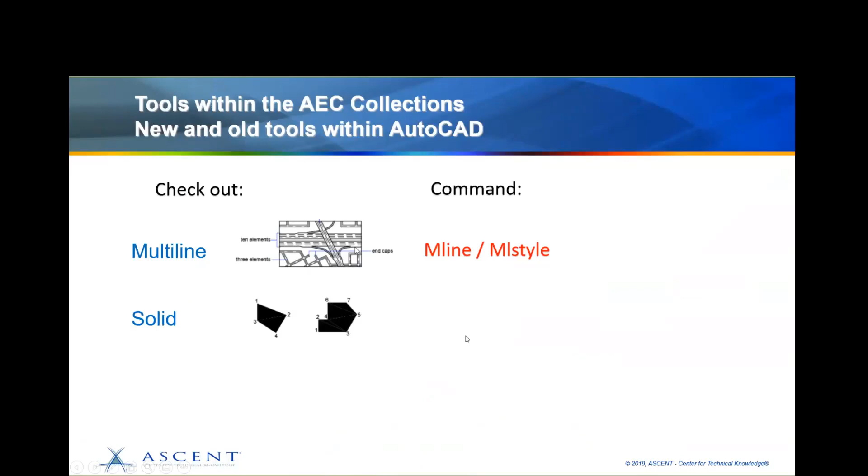Okay, so I went through quite a few tools here, some old and some new. Last month I talked about the multi-line style. The command for the multi-line style is mline, or mlstyle actually creates the styles for your multi-lines, a nice command I think has been forgotten. The solid command is pretty neat, the command for that is solid. And if we go way back to the trace command, the command for that is dot trace. So try out the dot trace command, it's pretty neat.

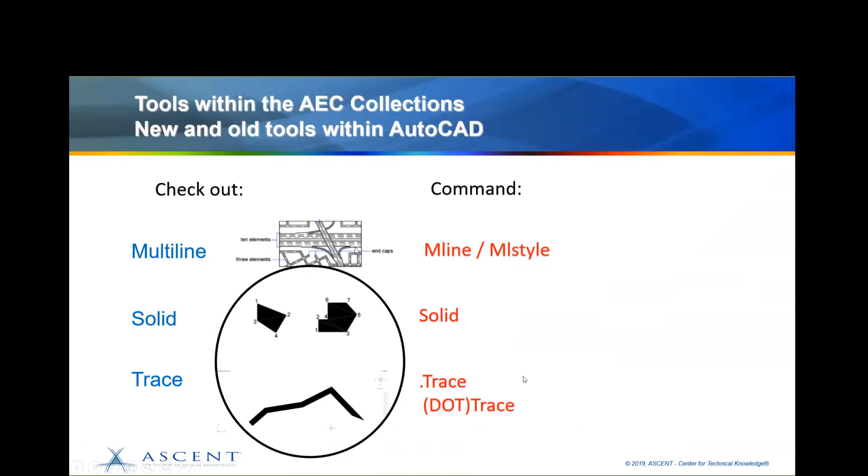And there's a grumpy old man. There's another grumpy old man.

So I want to thank you very much for attending this session, and I apologize for the technical difficulties that we had.